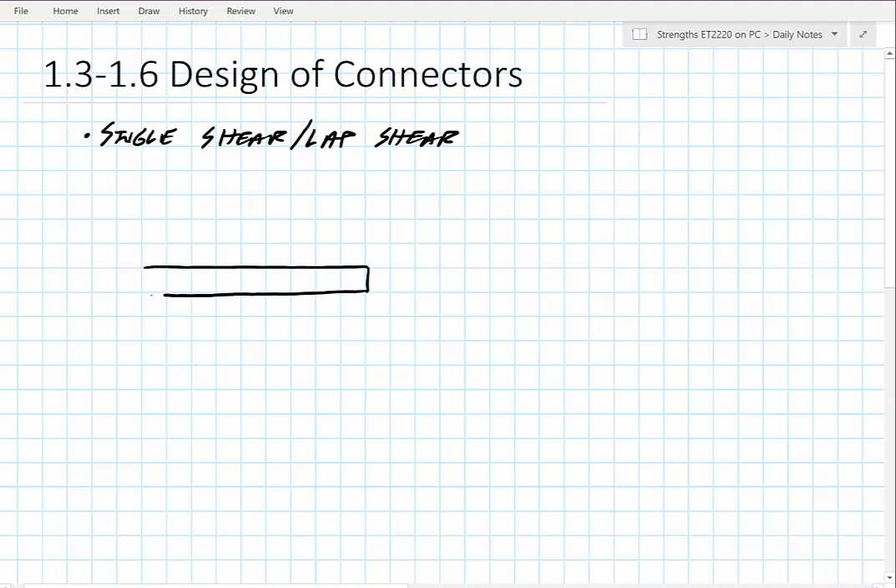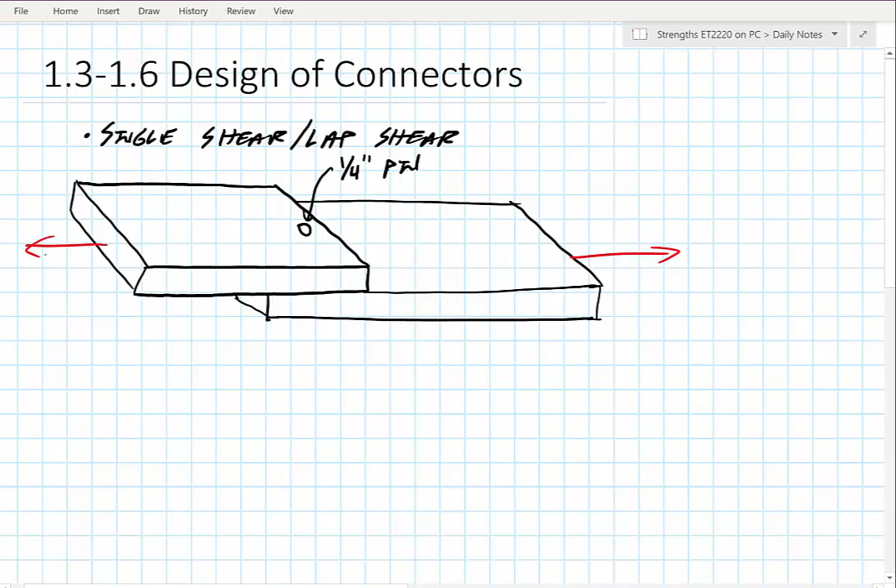For the first type of connector, we're going to look at the case of single shear, also called lap shear. I'll draw a loading scenario here: two plates overlapping one another with some kind of pin in here. We'll say this is a 1/4 inch pin holding these two pieces together, and we're going to pull it in tension with 200 pounds of force so we can use real numbers. We're interested in this pin itself and what kind of shear stress is on that pin.

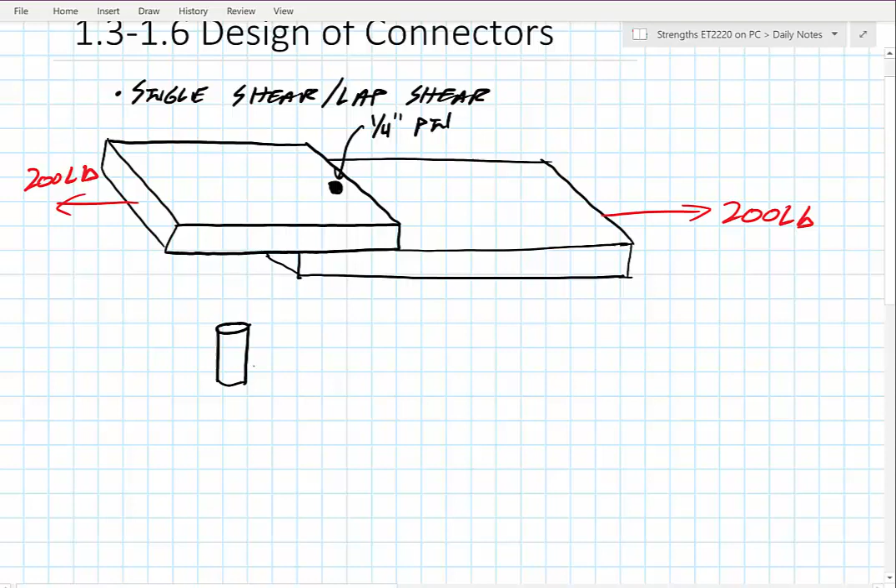If we blow up this pin separately, we'd see there's essentially a plane where it would shear. After it fails, I end up with two separate pieces, a top piece and a lower piece, with a single shear plane. There's only one, which is why we call it single shear. Going back to tau equals V over A for average shear stress, our shearing force is this 200 pounds, and our sheared area is the cross-sectional area of the pin, pi over 4 times the diameter squared.

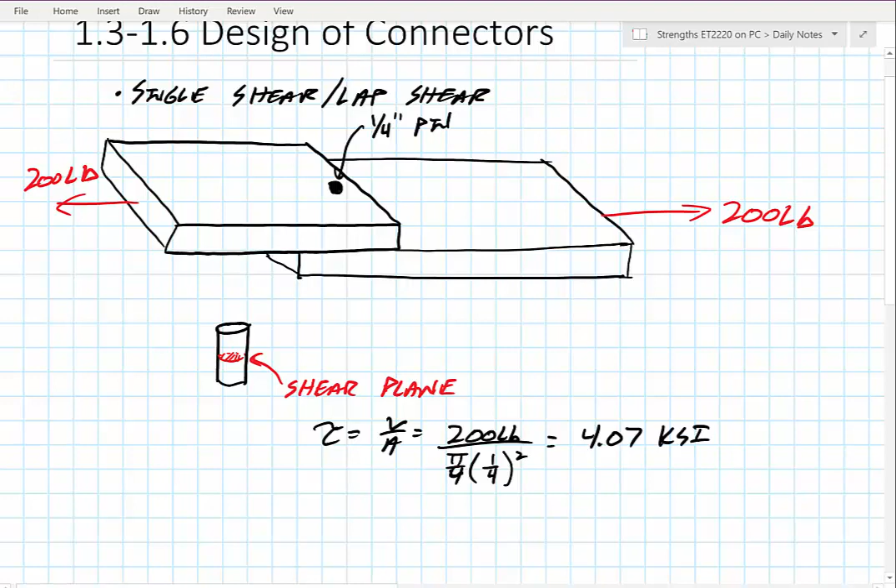And that gives me something like 4.07 kips per square inch. Now if I were to take the same scenario, but instead of having the single board up top, I had more of a pinching situation, something like this.

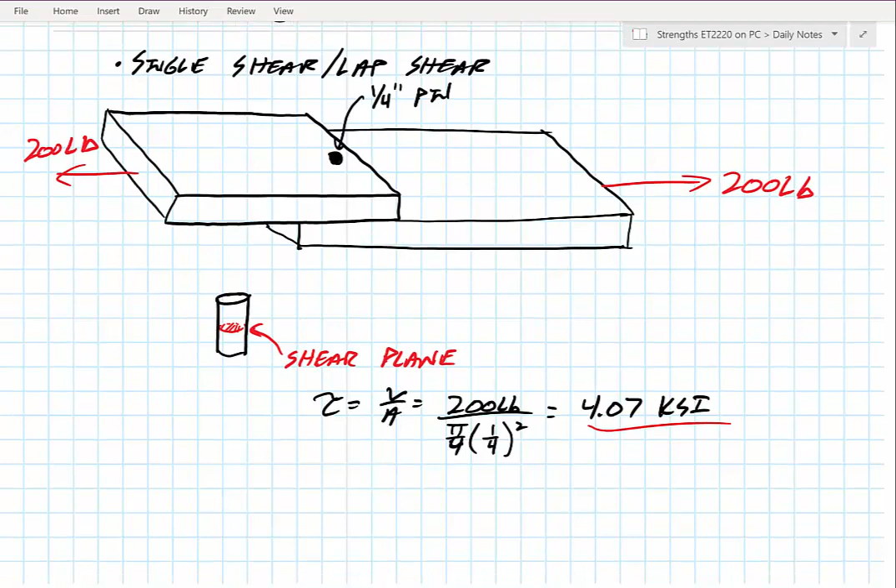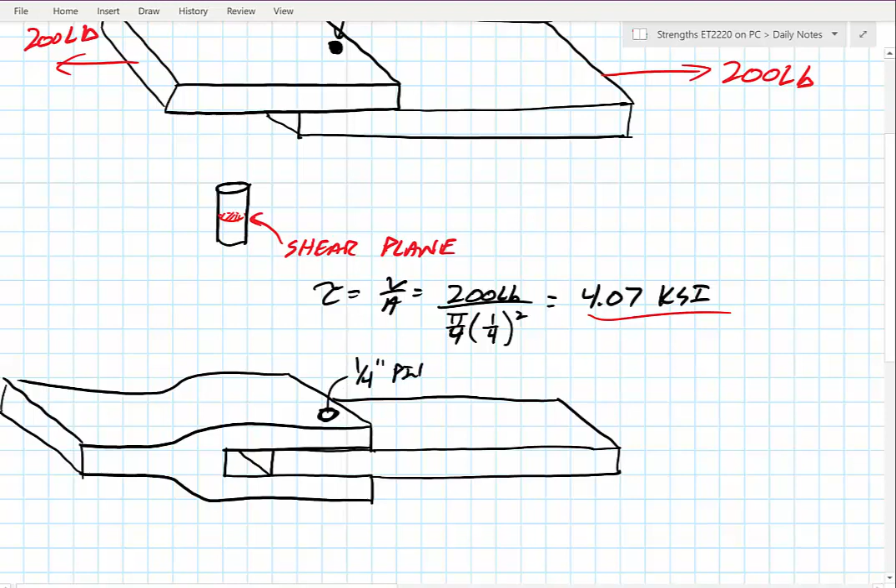We're still going to have the same 1/4 inch pin, supporting the same 200 pound tensile load. If we look at this pin, this whole board, if it failed, would be pulled straight out, and I'd end up with two sheared areas, or three pieces of this pin as it fails. Hopefully you can see how this board is pulling on it on those two sides, and you'd end up with this little chunk in the middle popping out.

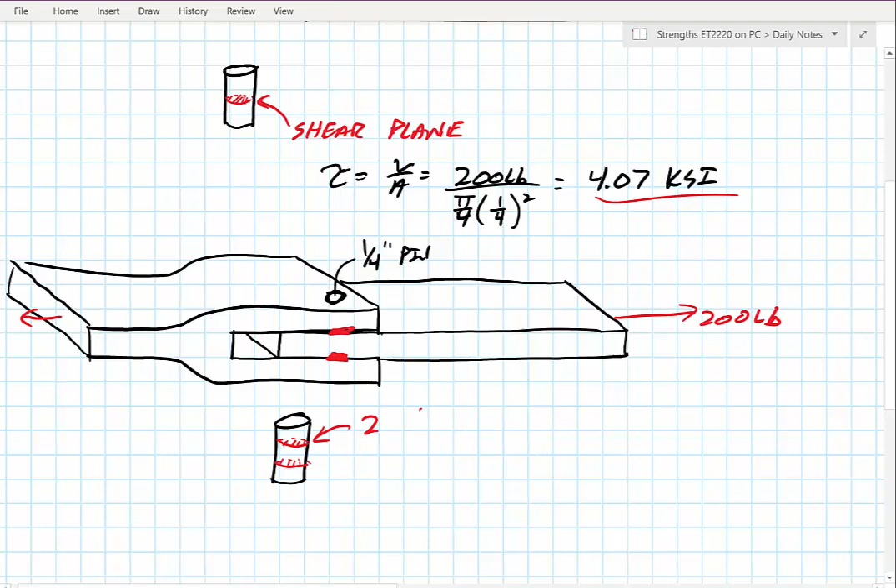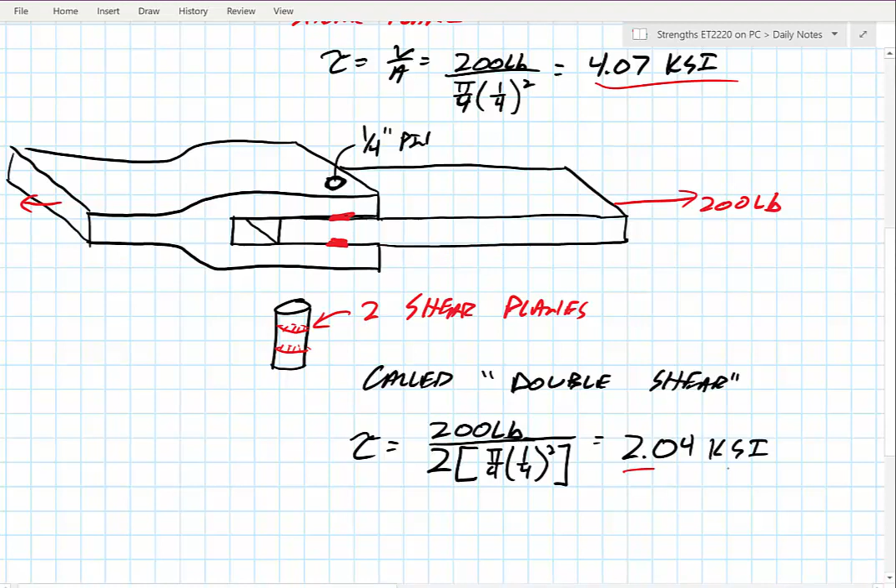Because we have two shear planes, two stressed sections, this is called double shear. As for our shear stress, it's pretty easy: we're increasing our area by 2, so we have the same 200 pound load, but now since we have two of these areas, each one having an area of pi over 4 times this 1/4 inch squared, it gives a stress of exactly half what I had before, as we'd expect, 2.04 KSI. You can imagine having as many planes as you want if you create almost like a hinge looking structure.

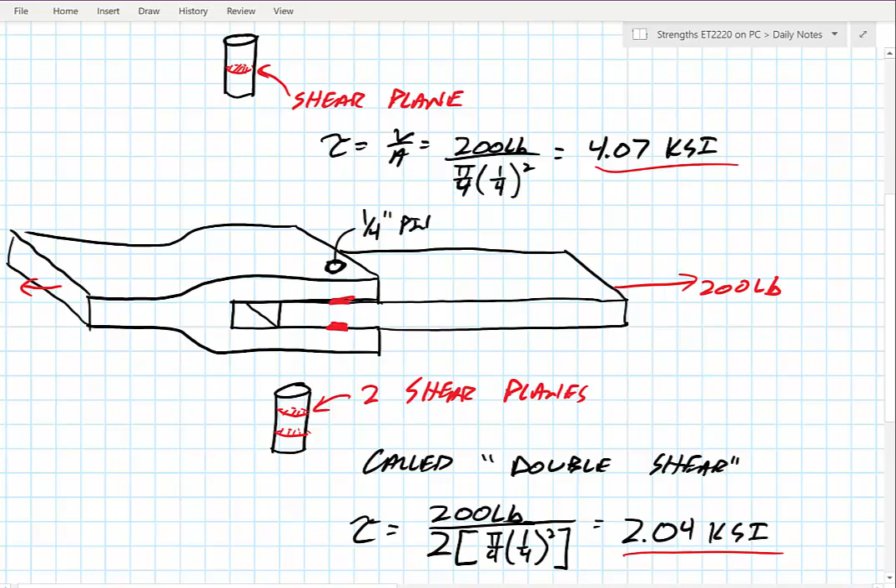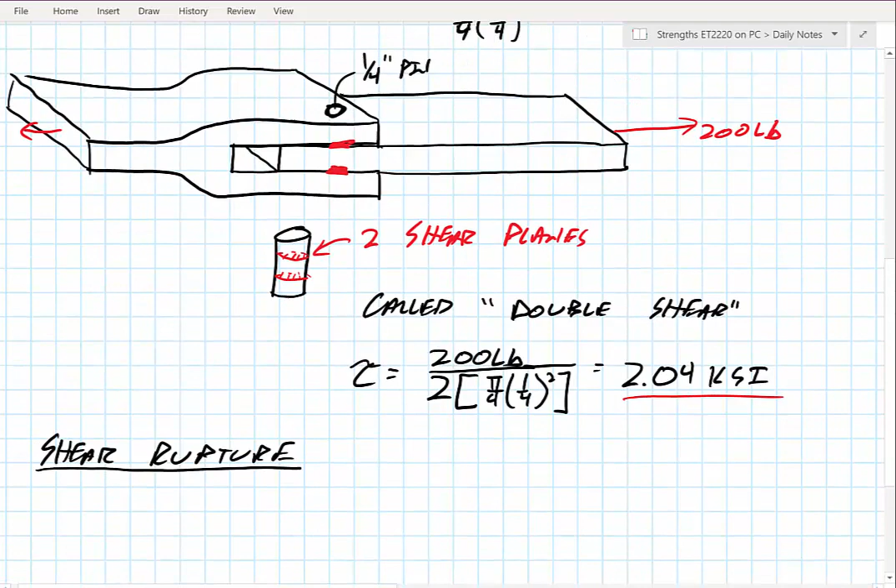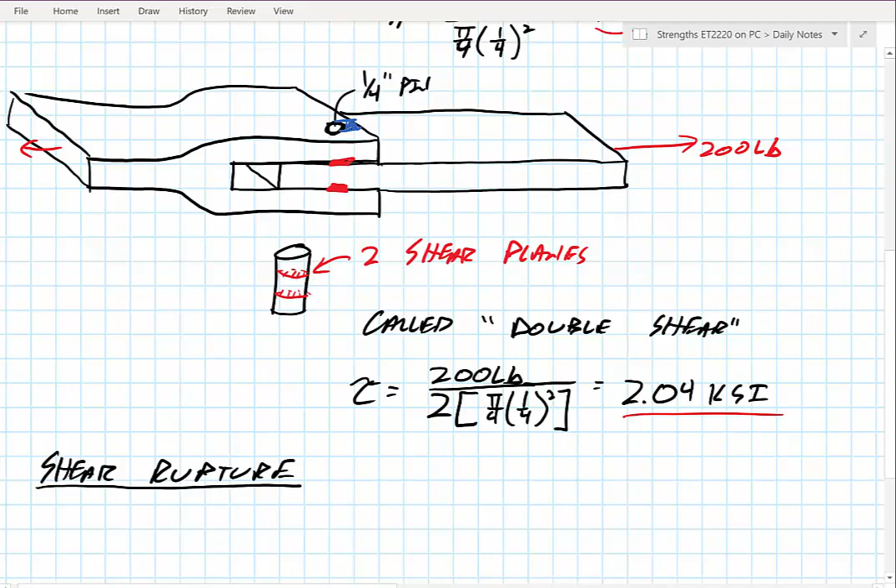So there's single shear, double shear. The other situation we need to look at is shear rupture. Shear rupture looks at the material strength of our board as opposed to the pin strength. For instance, if this pin were strong enough but set too close to the front of the board, you can imagine this big chunk of material being pulled out and the top board failing. That in essence is what shear rupture is. Let's take a look at one board and how that would look.

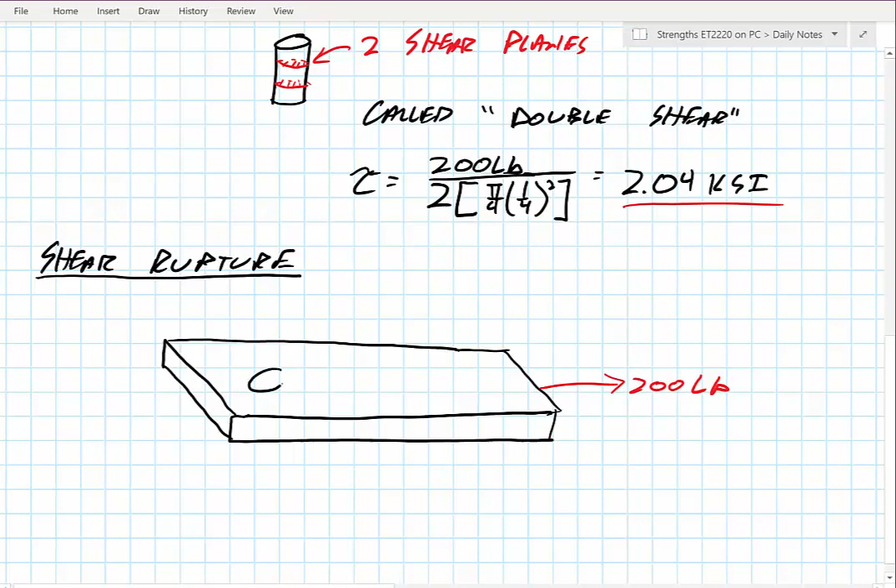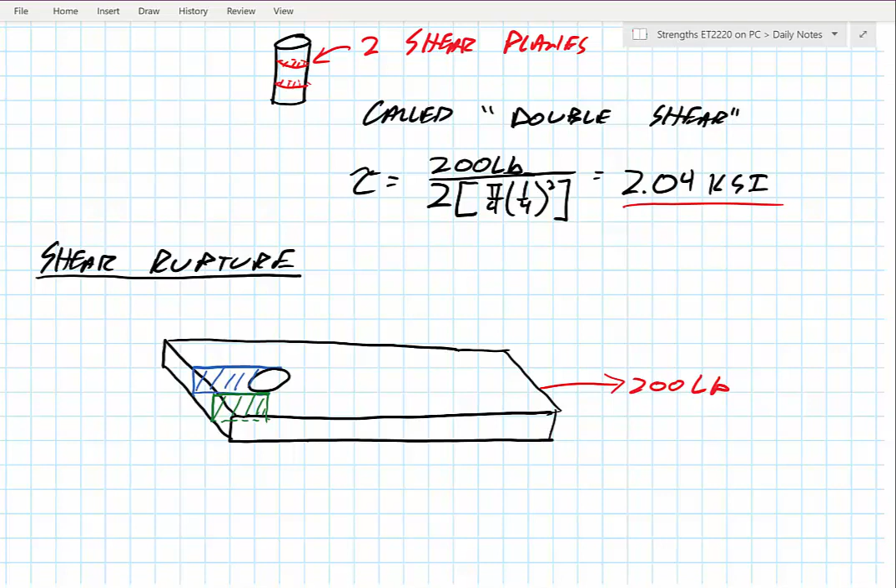If we pull at the same 200 pounds we were just looking at, with the same pin, I'd end up with two failure planes because there's this chunk of material left over. Let me try to draw these two planes - this is going to look kind of crazy in 3D, with one plane along here and one plane back there. I think a better way to look at this would be in a 2D context.

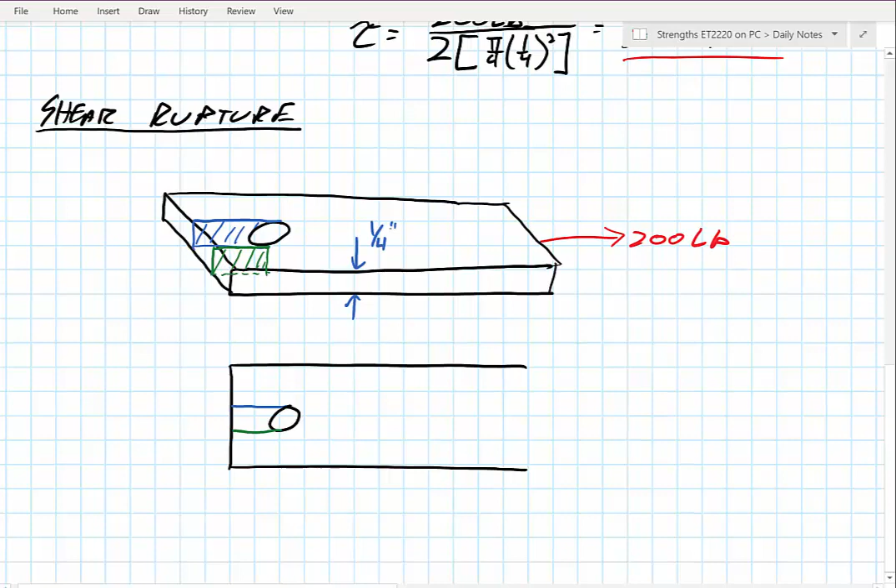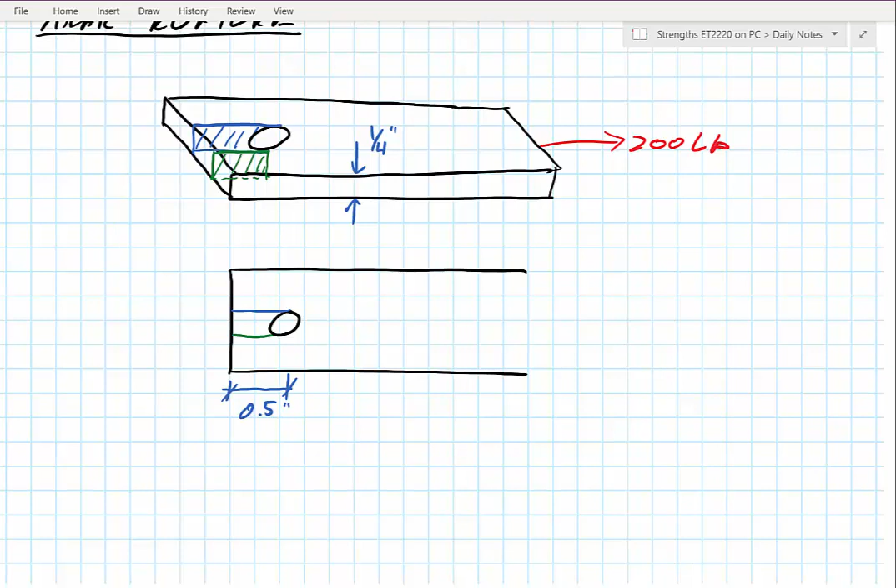From a top view - probably should have started with this top view - if I have this pin, I can think of this material being ripped out from the edge on over. If we say this board is 1/4 inch thick, and our pin is placed back from the edge a total of 0.5 inches, then the area from this green area and this blue area give us two shear planes, each with a cross-sectional area of 1/2 inch by 1/4 inch. So the total area that must be sheared is two sides, the blue and the green, each side being 1/4 inch by 1/2 inch, giving me 0.25 square inches.

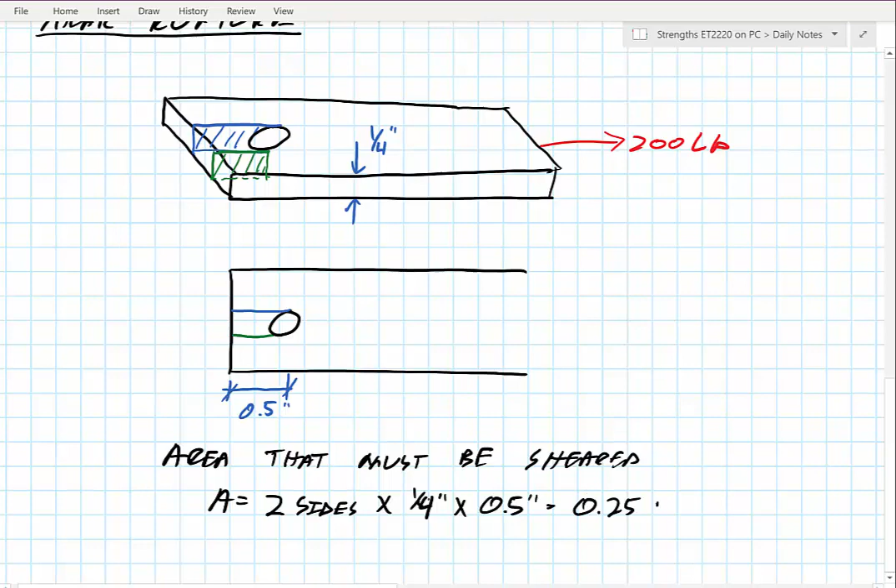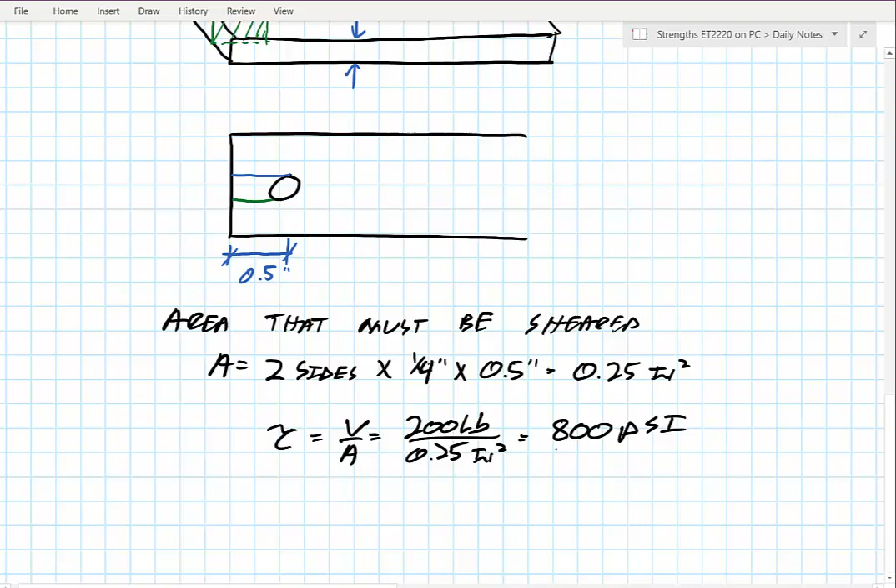So when we talk about shear stress on this board, our V over A, the shearing force is still 200 pounds, and I'm dividing by this total area of 0.25 inches squared, leaving me with 800 pounds per square inch for shearing force on this board. And of course you could do that for the top plate as well, and you'd have double shear.

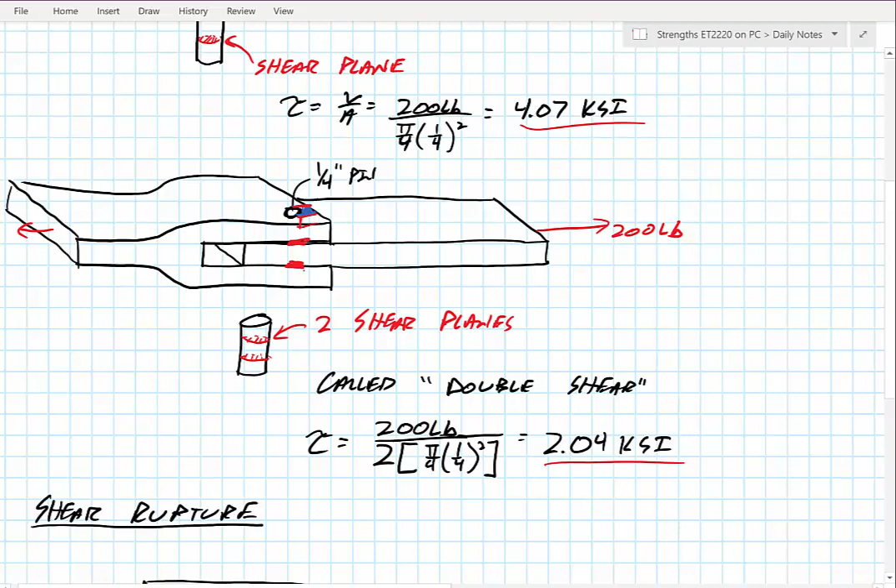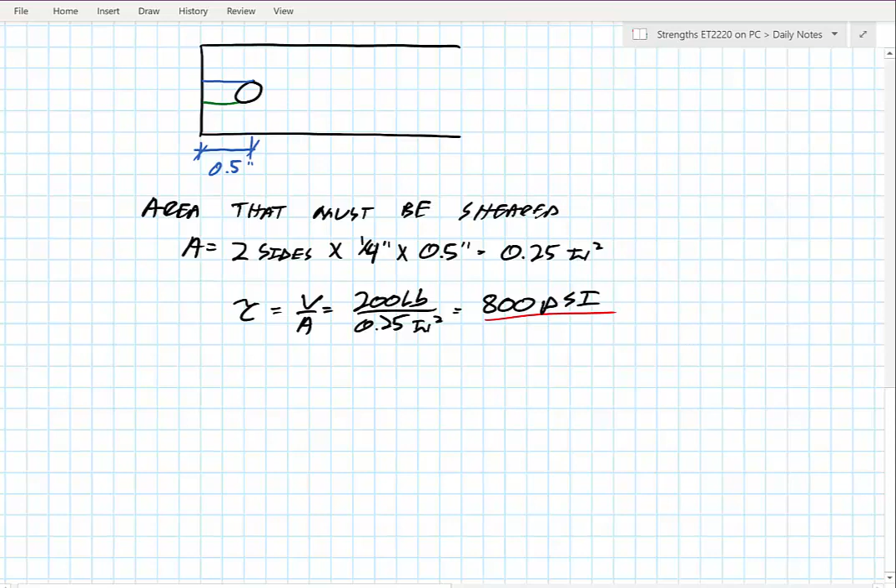For instance, if I were looking where I drew this guy up here, I'd have a plane there, a plane down there, ending up with a whole bunch of planes - actually 4 planes to be exact. You can look at the material of the board in that aspect as well. So that's the design of connectors with shear rupture and with single shear and double shear.